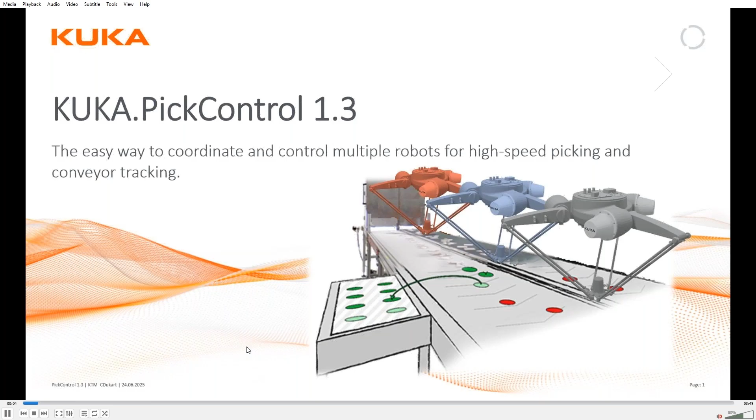So the part we're focusing on today is more the pick and pack side of it, not the palletizing side.

And I see my slides are not starting here for some reason. There they go, they are starting now.

When we talk about the pick and packaging side, we have some type of inbound conveyor, with parts coming down maybe randomly, maybe in a straight line. And then we want to take those parts and stick them into some type of container, maybe chocolates that we're palletizing or moving back and forth.

We can use various types of robots, we have our Agilus robot here, our Delta, and then Scaras. And most times, if not all the time, we have external resolvers that tell us where the packages or containers are on this side. Also on the inbound side, they tell us where each of these packages are based on a vision system, so we get an X, Y, and maybe some type of rotation.

We also have another resolver here, but you don't have to use a resolver, you can do it a couple different ways with your own external encoders also. And then we have some kind of trigger switches, like the prox switch shown down here, because we need to find out where the leading edge of that container is at, or the same goes here as we need to know where that package is at so we can go pick it up.

This uses the KRC5 controller, the micro controller, and then this is showing an IPC. Here we use this to help us out with the vision system side of it.

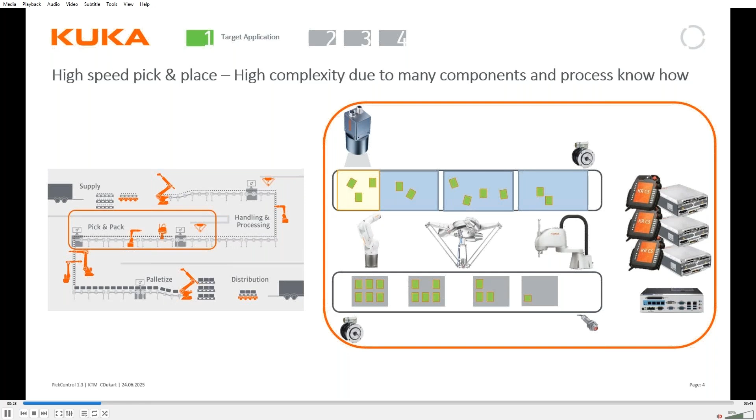As far as the software goes, the example here is 3 robots. We have a master and then 2 slaves, but it can support up to 10 different robots, or 1 master and 9 devices. And each of these robots have some working area. So here we're palletizing these cubes in the form of this KUKA logo.

Also, it is on 8.7 software, so 8.6 is not supported, just the 8.7 software. There's a couple different flavors. The PickControl Master here would integrate the KUKA Vision in it, but we can also just have a master robot with some other external sensor or SDK, this development kit that we provide. And then just basic software for the number of slaves that you need, so minimal amount of pick control software there.

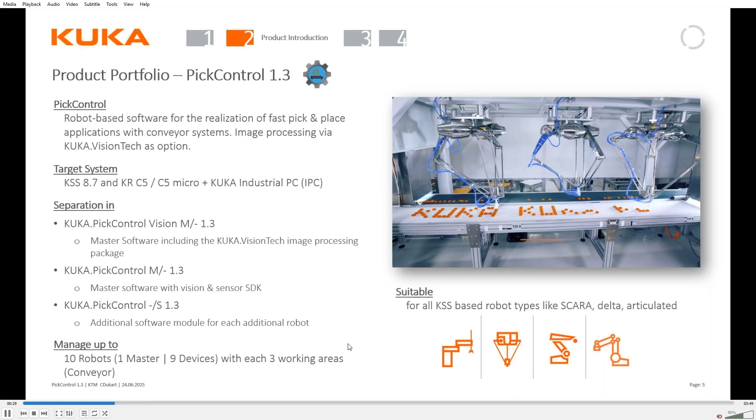And it's suitable for any of these machines, but it can also take the big machines also, even run a Titan if you want to.

So the 2 videos that I want to show are the first 2 here of some basic pick control applications that you see out on YouTube. I'll start those videos now. We won't watch the whole video, but some pieces and parts. You can find these out on YouTube if you'd like.

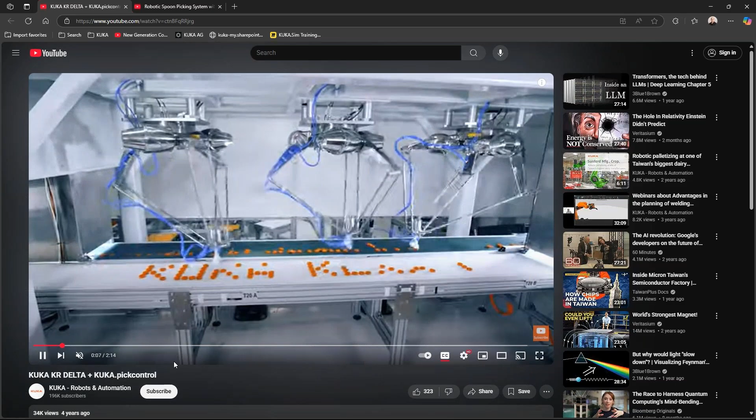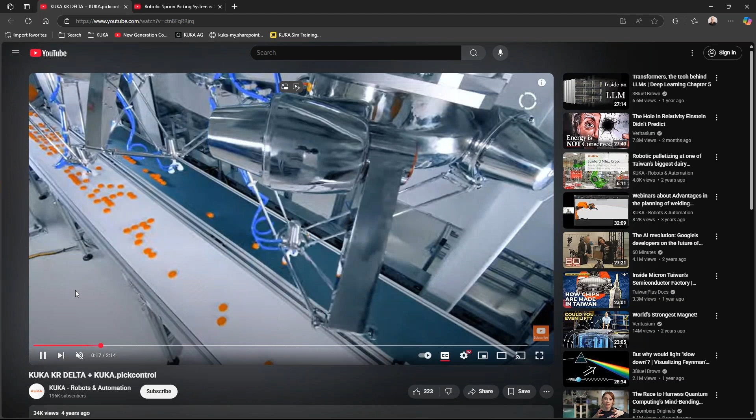So 3 robots picking parts off a conveyor. There's a vision system on the front side here that you'll see in a second. They're randomly defined, no orientation control here because they're just round hockey pucks. So here's the vision up in the front that's processing the parts and giving the information to the 2, or in this case, 3 robots.

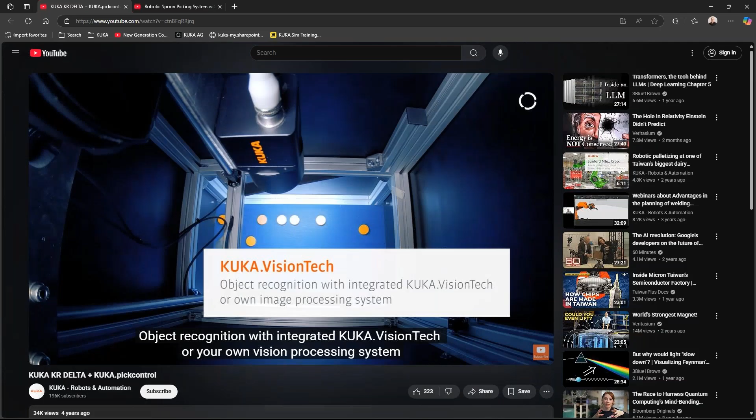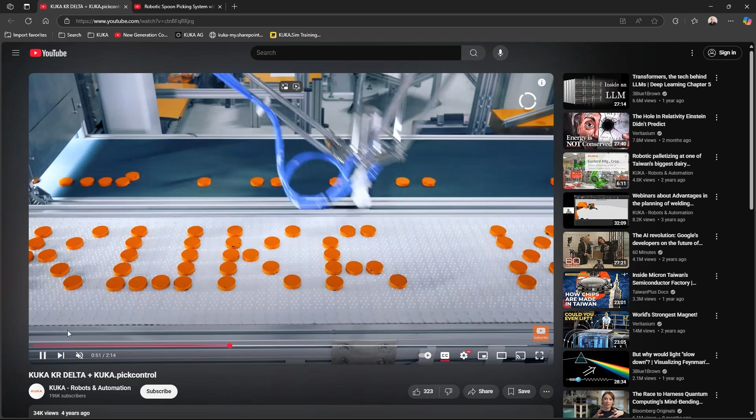And just some different software that we have. We'll talk about these pieces. This is how we define that whole KUKA logo there in software, so lots of different control there. The whole idea of this software is I minimize, I don't have to teach all those points. They're all calculated for me.

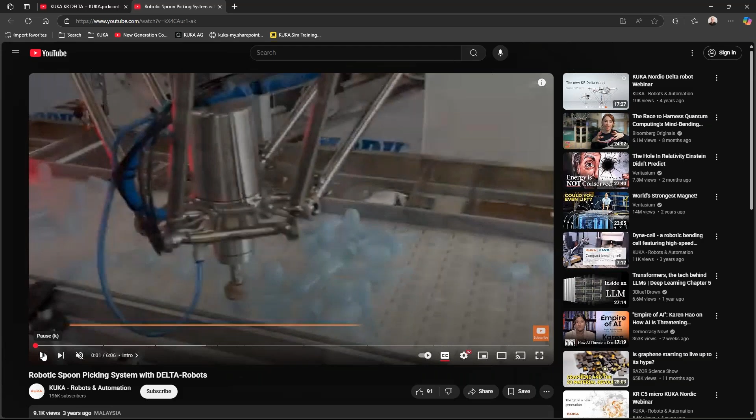All right, next one here I want to show is the spoon palletizing. This one was done in Malaysia, and I'm picking up these plastic spoons that are here.

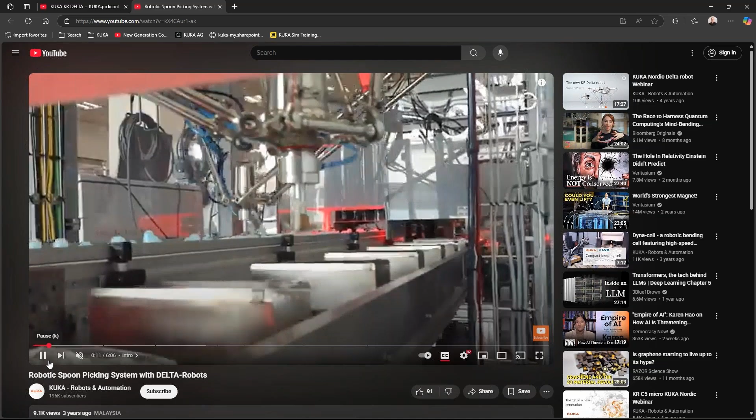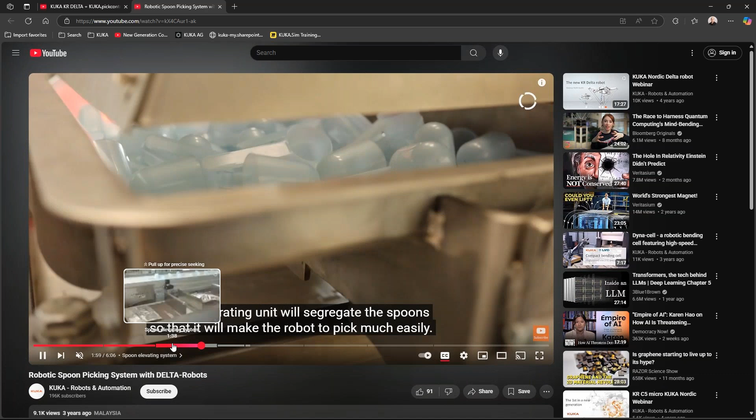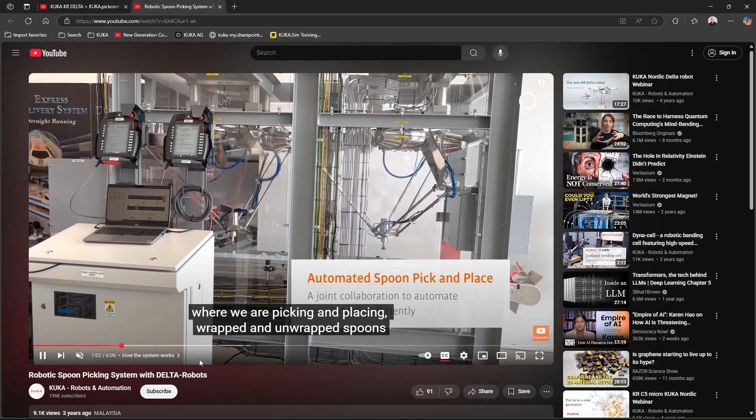I'm going to jump forward here, we don't need to watch this whole video, to the important things I need to show. Somewhere in here it shows the whole machine picking and placing the product, so one spoon goes in each of the protein bags that are there.

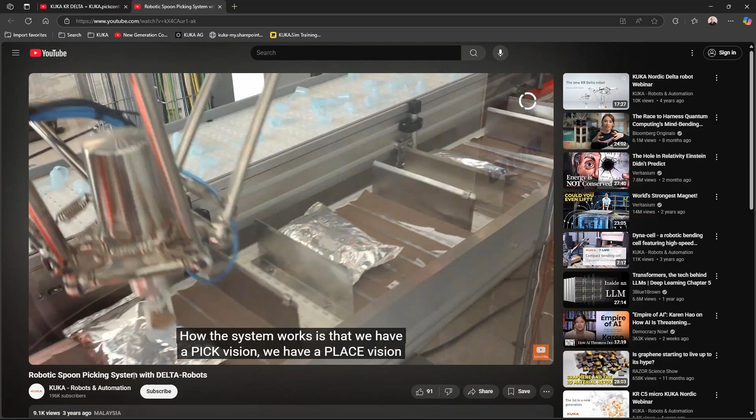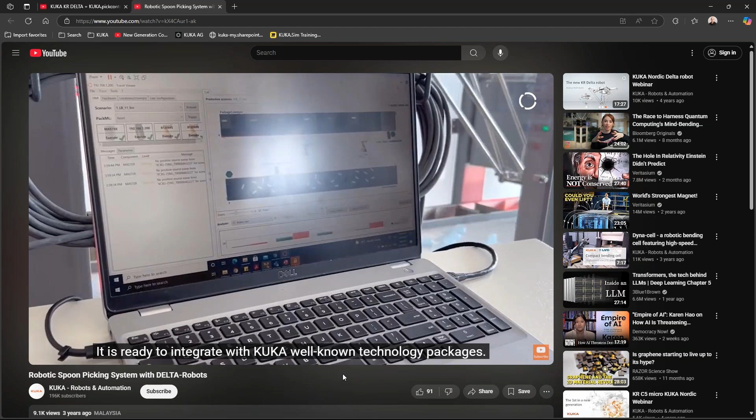And then I want to jump forward here to some of the setup to show that. So this tracking part, the vision system that's there, and should be right after this, some of the calibration fixtures that are used.

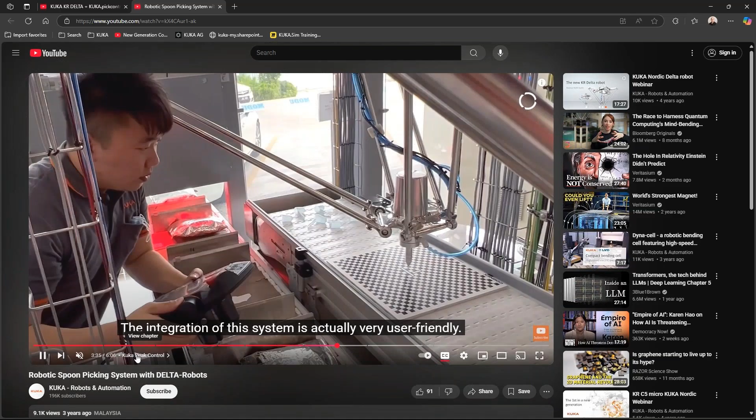Yeah, so the pointer is taken out, and then we use this calibration plate here. This is mostly used for the vision, but you use a similar calibration point to define a start location where you want to start, and then 3 points on the conveyor that defines where the parts are at, or the angles and the frame that's defined there.

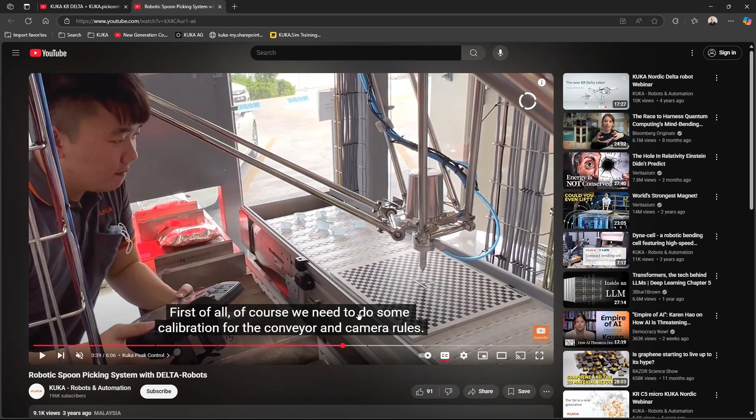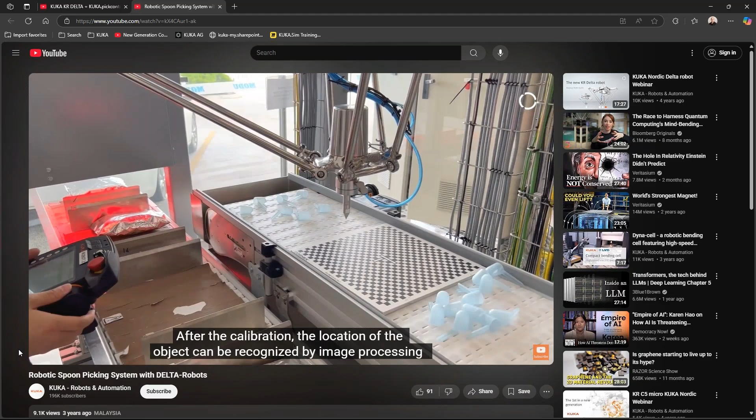That's what he's showing here, is teaching those 3 different positions. And vision is actually shown on the pendant. So we'll stop that and continue on.

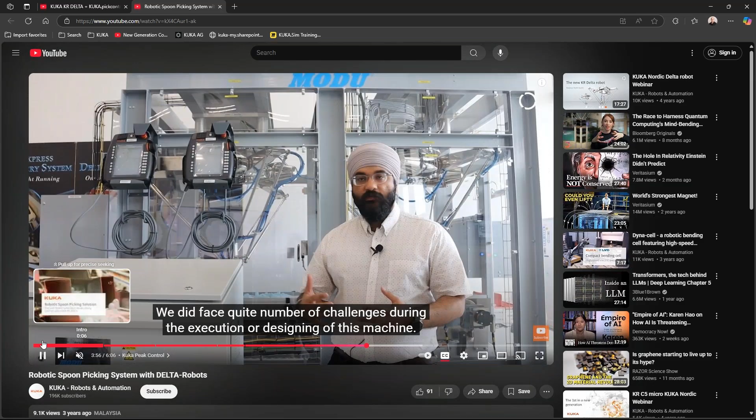The other items that are here are some of our setup videos on how to set the software up. There's a full video that shows you pretty much from start to end, and then some other marketplace items and the manual, which we'll go over here.

Okay, next section here is how to define the configuration. Everything is done in Work Visual, and you'll see this object structure. We'll spend a lot of time in here showing that, and then the definition, or this tracer view, as it's called.

There's also guided wizards to set up all the sensors, light barriers, conveyor positions, where we figure out what the transmission ratio is based on starting and stopping the conveyor, so that it smoothly picks and places how it needs to. And then the different scenarios.

So these scenarios, another word for this would be recipes. So that's what the production scenarios are called here. And we'll just jump forward here. We'll show more details on this a little bit later.

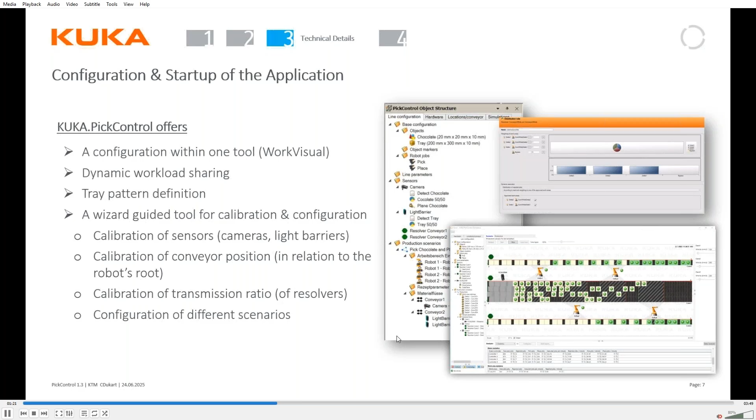All right, so some of the software components that are there, we use our PC and we configure everything in Work Visual. We also have an IPC for the Pick Control Master. So if we had 5 robots, we'd have 5 of these different machines, R1 through R5, and then we'd have an IPC also.

So the whole project and all the configuration also goes down to this Pick Control Master, so it knows where everything's at. So we can nicely see all the production information on this tracer view. It's a very nice tool. Love that tool, it helps a lot. And a bunch more diagnostics.

So on the robot side, on the controller, we have the Pick Control wizards that teach all my positions for me. We also have a PLC, a soft PLC, ProConOS that's running there that you would communicate to use PackML to control all the robots, and we'll talk about PackML a little bit later. The KRL is there, and then a conveyor driver that's run through PickControl.

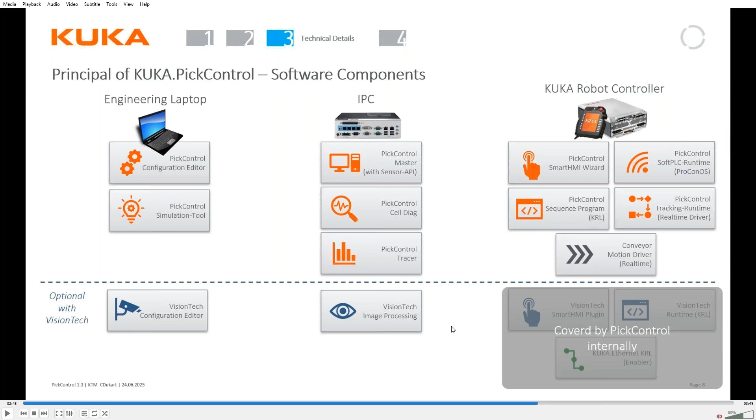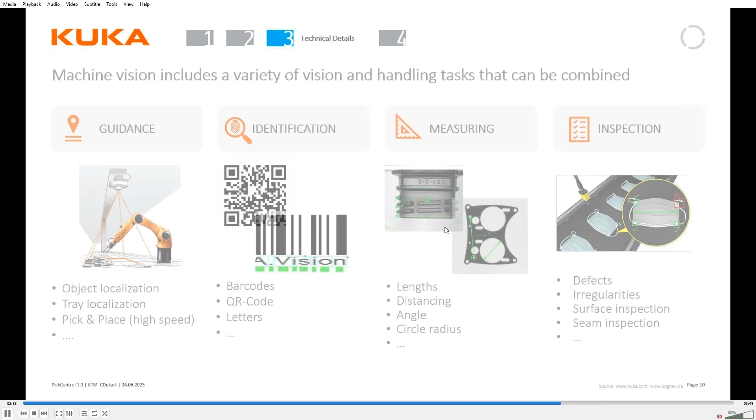And then on the vision side, we have a full Cognex library there that works quite well. That gives you all kinds of vision capabilities. Inspection, measuring, pretty much the whole thing.

So as far as the robots, we have a Delta machine that's IP69. You can see all these on the website. And then we have a composite machine also, which is right there, and this has the HO oil. So a little bit cheaper machine, not all stainless.

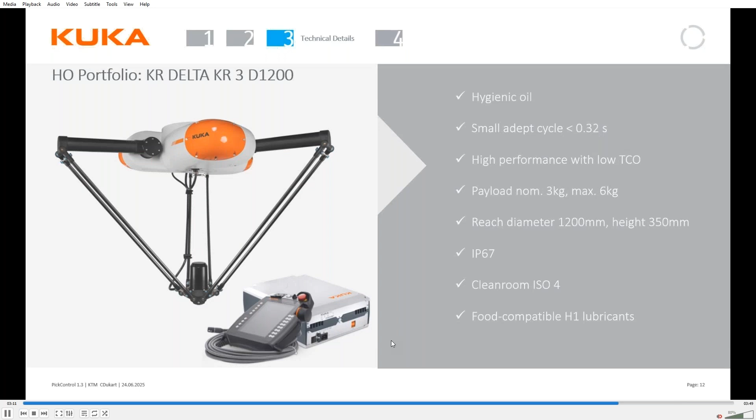All right, some of the key features here is the tracer view. As I talked about, one really nice thing that this does is this allows you to define all your scenarios and all your products, how they're going to be packaged. And then you can test this out very early on. You don't have to wait for the PLC guy to do all this work. If you are the PLC guy, you still don't have to wait for all this.

You can test this out and make sure it all works, make sure you get all your material flowing through. You can pick your product, place your product. So, very, very nice tracer view - a very good tool to use.

The communications definitely has to be PLC controlled. I would recommend that you have a PLC. It can be done through the submit, and we have done it before, but I think it's better if you have a PLC. There are so many parameters that you can change, and you want to be able to do that from a PLC HMI, not from the pendant if you can avoid it.

It's already got the DLIN or fast motion type in it, and the dynamic load sharing is a great feature - if I've got 10 robots, which robots get which data or which parts. Flexibility.

For vision, we have an SDK that you can use to define your own vision system. So it's a very wide open system, a good system.

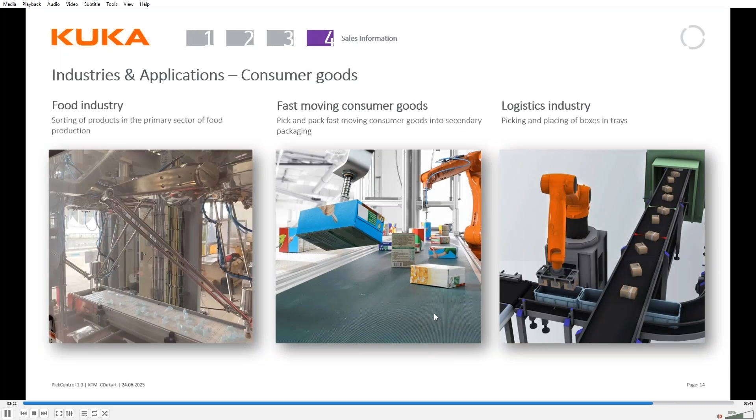Moving on, this can be used in lots of different areas - fast moving consumer goods, also automotive. I'll show some examples of that in a little bit.

Gripping and sorting parts, mixed parts - you kind of name how you want to do the system. It's very flexible in that respect, but does have some limitations as far as picking up parts at 90 degrees. You can consult with us if those special things need to be done.

It supports 10 robots and 3 working areas per robot, so I can have 3 conveyors. And if you're using your own IPC or industrial computer, you may want to check with us - it can be done, but with no PLC, as I said earlier, you probably want to have a PLC in the system.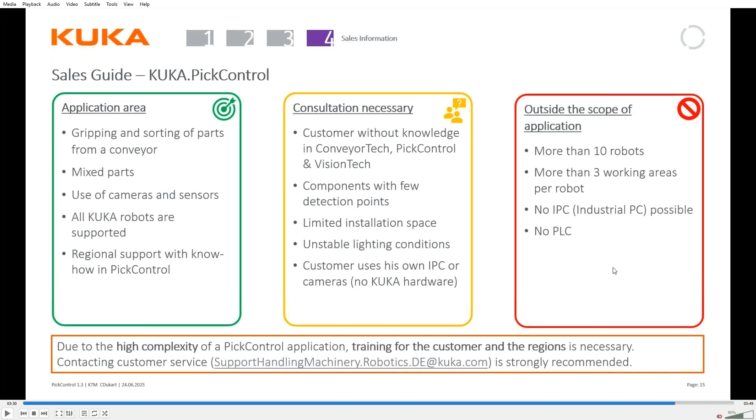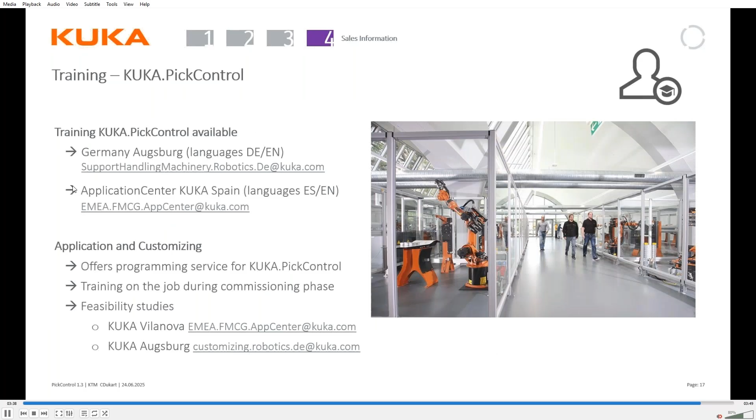So these are some of the questions you'd probably be asking - number of conveyors, and so on. We do have help - I'm one of the main persons in the US, but we also have international help too.

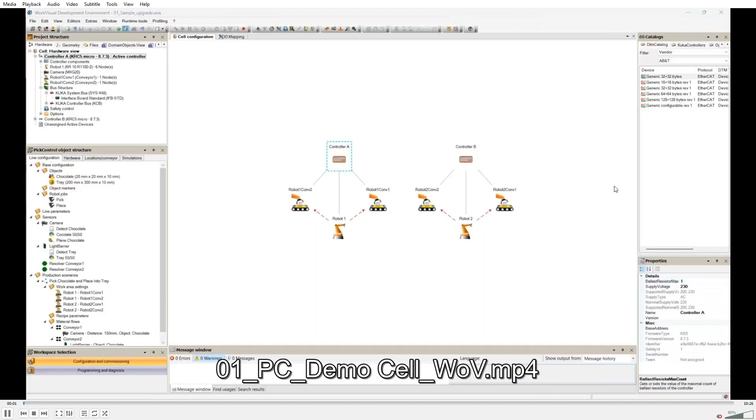All right, so let's move on to how we do things in WorkVisual. This is a sample that's defined in the software here.

If we go to the PickControl section, under documentation and the WorkVisual samples, this sample that I have here is the 01 sample, and the last one is a simulation. So we'll go through each of those now.

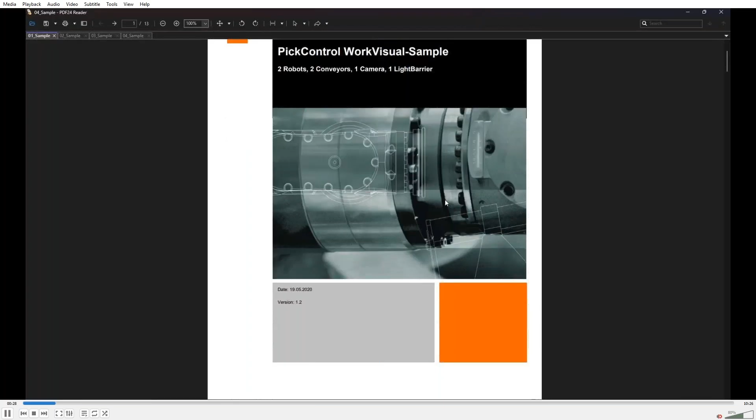This sample defines 2 robots, 2 conveyors, a vision system, and a light barrier. This document pretty much shows you how to create this whole template if you want to know more details about things here - 1 camera and 1 light barrier, and it takes you through step by step what you have to do.

So we'll jump forward here a little bit. This distribution is how we define what robots get what, and I'll show you some examples of that too. But all this is explained in this 13-page document.

This next one is one robot, one conveyor, one camera, one light barrier, and one fixed location. The fixed location is something that doesn't move. And then the last one is just a basic simulation - I'll show an example of this working and running a little bit later.

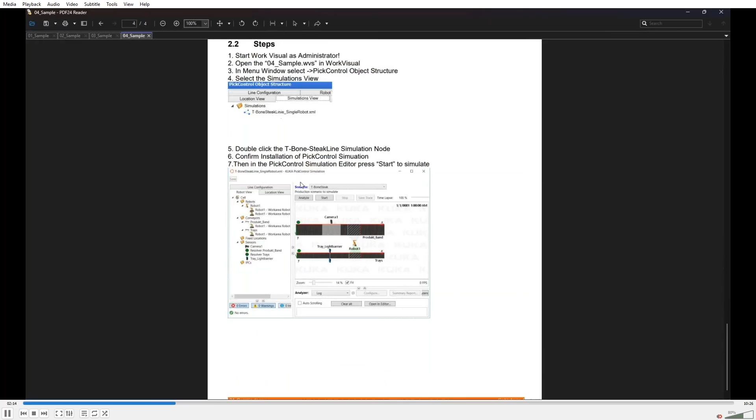So those are the 4 samples that are defined. And one thing I want to also show here is there are some KRL samples too, if anyone's interested.

Okay, so the first thing is the PickControl object structure. When I hit this button up here, that's what we're showing.

And then the next one is the cell view. So when you define a cell, we also have the cell configuration.

So we'll go back to that - what I want to show here is there are multiple conveyors. These are the KUKA conveyors that you have with the resolver, but you can also add external conveyors that are controlled by a PLC, maybe over Profinet, or just your own encoder feedback type conveyor. So other possibilities are there.

And then there's a way to generate all the code. That last button there generates the code so that you can use that on your IPC.

So the object structure here defines what kind of product you're picking up, and this happens to be chocolate, 20 by 20 by 10. Once we open this up, it comes up with a dialog box. Pretty much all these things have dialog boxes, and you can load your own image in here.

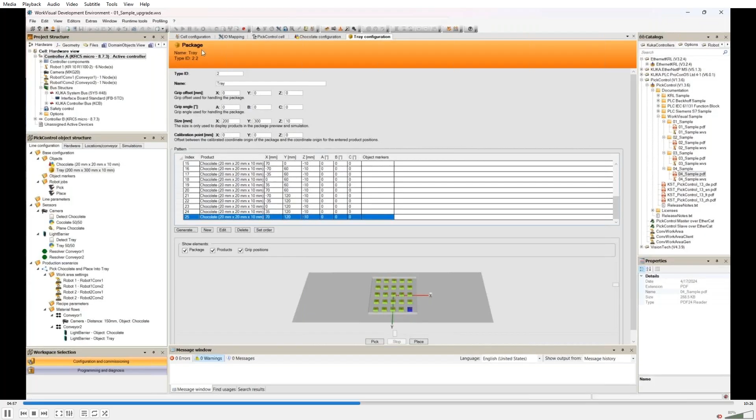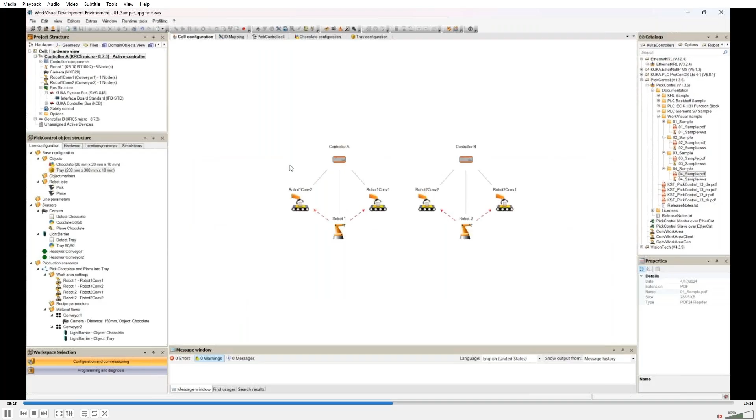What this is showing here is when I right click... There's conveyor 1, conveyor 2, and I have a resolver on each of these. I have a camera, and pick zones for robot 1 and robot 2 of where it's going to go. The light barrier there is for the tray. Here's the drive configuration. All our resolvers go in the back of the robot, so this would be the master, and it would have 2 resolvers going in the back. That's what this is showing, and the conveyors below it there. So that's our position tracker.

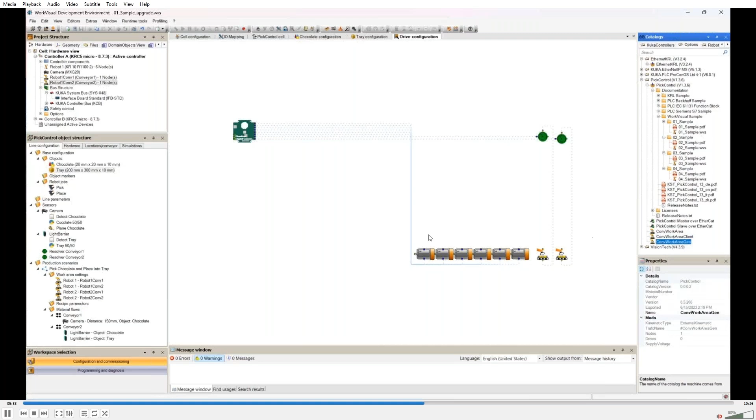As I talked about earlier, these other 2 types of conveyors are a Profinet conveyor, and then you can define some type of resolver, or not a resolver, but an encoder type input. So there's definitely some choices there. All right, what's next here?

Okay, sensors. There's our camera, and we've got a task always to detect our chocolates, and our light barrier also has a task to detect the tray for us. Those go into our fast inputs. The double click there shows the distribution rule. In this case, we've got 2 robots and they're both taking 50% load. Could be a different type of load, and if it can't do it on the first robot, then it automatically goes to the second robot.

And this is showing the second part of it on the second conveyor, conveyor number 2. What's the load distribution? Again, 50-50. And I'll just divvy those up as it needs.

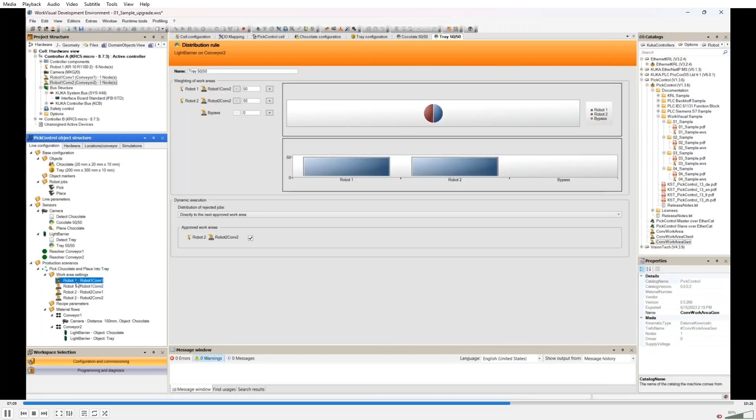Okay, so the last item here is how are our scenarios done, or what do the recipes look like? You can create new ones, you can duplicate them. I'd suggest you get the first one working properly and then go from there. These are the work areas. You define a number here in millimeters from the origin of the robot, left and right. That's the number it's showing there, and the same for the other robot. So we have 4 work areas.

Okay, now we show the material flow. If we have a camera and a trigger distance, this first conveyor shows us what the material flow is going to be. So we're picking product here, that robot job is the pick. And then we have our distribution of 50-50 that we defined earlier. And we're detecting chocolates - the object is the chocolate.

Then we define on the second conveyor, the tray is I/O triggered with a trigger switch, a fast input. We're going to detect the tray, display the tray, and the object going into the tray is the chocolate - that's our placing routine. So the pick and place are pretty much all canned and defined, not many points that you have to teach. Very nice system. The second one there is if the trays don't quite finish in the right amount of time, we have to tell it that it can bypass that - this one right here, also I/O triggered. We must have that, or it won't work and it gives you an error when you build the project.

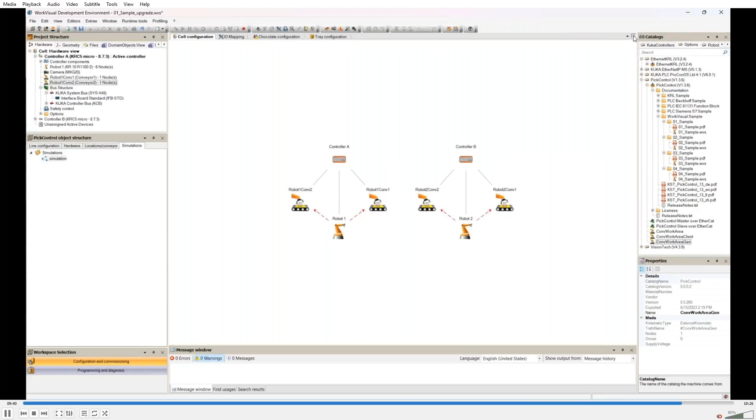have to build the project. So I'm closing some windows here. And everything is saved, and now I'm going to build the project. Oh no, there's going to be a problem, I have a feeling. Yep, there is. It didn't build.

Why is that? So we double click on it, and you can see here that we didn't set this output. So we need to make sure that controller 1 goes to our trigger, goes to a fast input. So that's what those 2 are there. Now we should be able to build the project, and it should work.

And what you're going to do is once you do this, you're going to send both projects to each robot, and then the IPC master also needs a project. So that's what that other button would do. And we'll move on to the simulation.

So once this is built and working, we can go use our simulation, or it's like a modified tracer view, and that's what this is going to show.

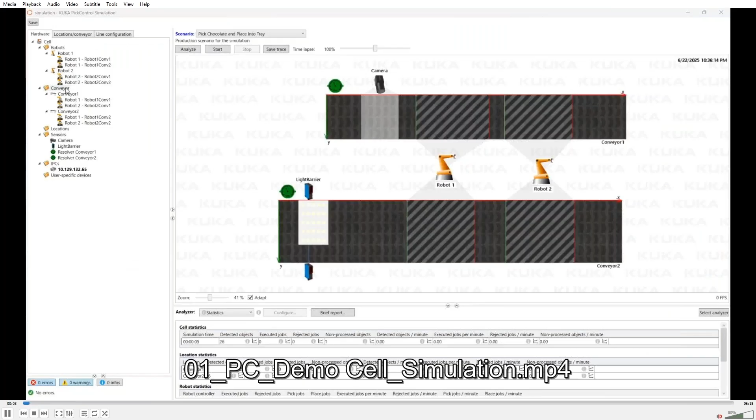So for each of our conveyors, we're going to define a velocity. So we got 160 millimeters per second, and then we need to tell it how we want it to generate objects. So we're going to generate chocolate here, and the position is going to be 150 millimeters away, and then it's going to rotate that by 30 degrees plus or minus. So we have random products that's going to be coming down on that first conveyor.

And then the next thing we'll have to do is we'll go to conveyor number 2 here and do the same for the tray. That's this tray that's here. And we're going to run at 42 millimeters per second. And this is just going to be an offset of 150 millimeters. No random spot on the second conveyor.

And as soon as all those parameters are set, we should be able to start the simulation. So we press the start here. I guess we're going to look at, this is a very important point. So the execution time here, so this is 500 milliseconds or a half second. That's how long it's going to take us to pick and place product.

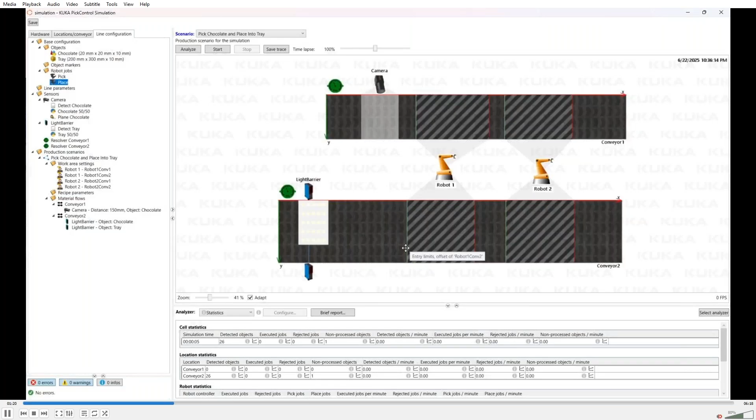And why this is important is this is going to kind of dictate our cycle time. So we need to have some idea of what that cycle time is going to be, maybe just estimated, but you can play around with these numbers and kind of figure out where you need to be for the cycle time. Now we're going to press start, and it's going to do this simulation based on all the parameters that we've defined. Takes a little bit of time to start here.

And I'm going to go look at the statistics, and the number I want to see is how many dropped trays that we're not going to be able to fill. That's the most important to me. And we got 160. If you see on the right hand side here, we got 160 for conveyor 1 and 42 millimeters per second on conveyor 2.

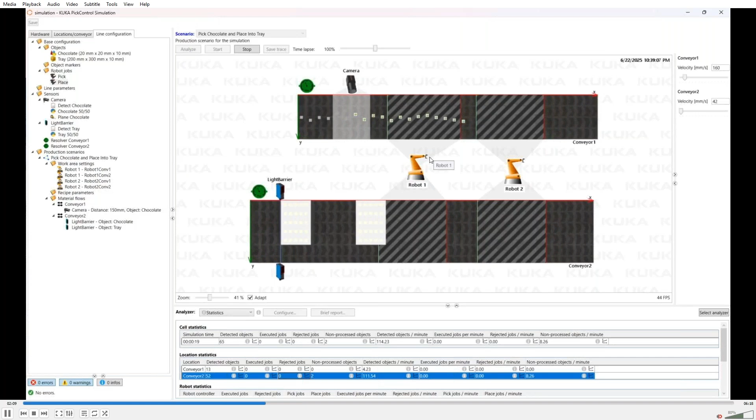So our product's flowing down randomly. We define that random offset, and robot 1 is picking and placing. You can kind of see it here, hopefully on the video, but you see there's a little dot here. That green dot says I'm picking and placing, and then it places product in here. The entry and exit limits that are set up and defined for the product so it can reach them.

Entry and exit limits - so the green and the red is what that's showing.

We're going to slow down the inbound conveyor a little bit, and probably go faster here, to 44. Does it miss any rejected jobs? Right now we don't have any. The reason we have 62 above on conveyor 1 is because we're not always picking and placing all the time, so we miss some of those products - that's why they're orange.

This one's probably going to miss - maybe we got to jump the speed up a little more. I bet we're going to miss some here. There we go, we missed some, so we should see some numbers pop in. If we move a little slower, maybe we'll make it. So you can do all these what-if scenarios here very nicely.

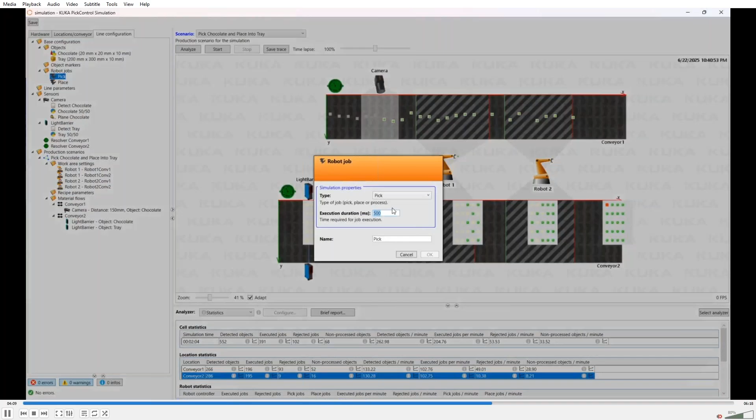Okay, now we're going to stop and change the pick time. We go to that robot task up there - as soon as it stops, we double click on it and we can change this. We'll change it down to, how about 350, so it can pick a little faster and therefore should be able to place faster. So that's where you set your pick and place time.

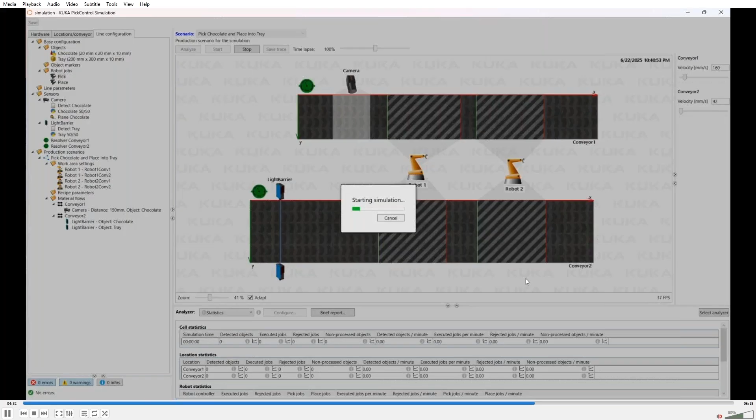And we jumped that up to 42 millimeters per second - jumped our conveyor speed up a little bit. You can see the dot signifying it should be a little bit faster now, and you can see by that picking time, that really fills this up. It's way ahead, quite a bit faster, and we should easily make the rate here. It looks like we're way ahead.

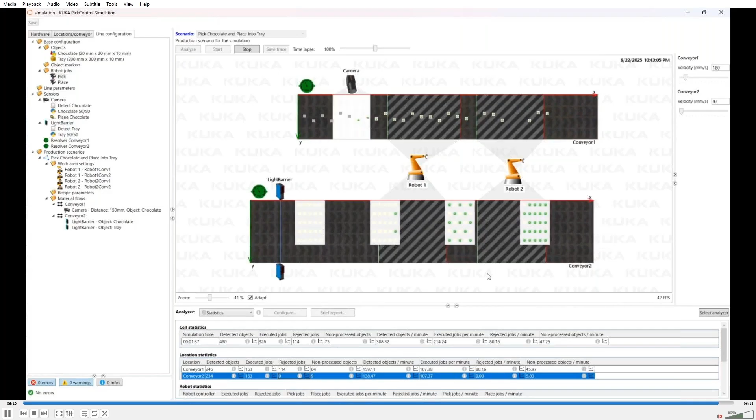And we have not missed any jobs yet, it doesn't look like. So we can jump that speed up - we'll go to 47 millimeters per second, and we should probably start losing some now. Yeah, I bet we're going to lose some right here - oh, maybe the next one. But you can still see we have no rejected jobs on the outbound. Are we going to lose some? Well, eventually we'll probably lose some.

Okay, so the next section is example number 4, and this is simulation only on the 04 sample. You can see nothing is defined here. This is just a simulation, and I personally don't like to do it this way because then I don't have any real cell. When I create this cell, I can download this whole project to the robot controller, and everything should be set up and working for the most part. I'll still probably have to play around a lot in the real world with gripper times, scenarios, and exit and entry zones, but I can do a lot of this work up front.

So let's show the simulation here - here's our T-bone steaks. This is a little bit different system: one robot only, an in-feed station, and a pallet station. So this one is defined.

All right, Jules, do we have some numbers for my questions? I'm going to say ribeye was the winner - we had a couple come in, oh, great group here for sure. That's my favorite too, love the spinalis around the outside on a ribeye, can't beat it. T-bones, too much work - way too much work. How about you, Jules, what'd you pick? I think I'm going to go with ribeye. I think that's a solid answer, good choice. I bet you're just saying that because I said it, right? No, it's a good one. Okay, alright, let's continue on here - you guys sidetracked me with the meat.

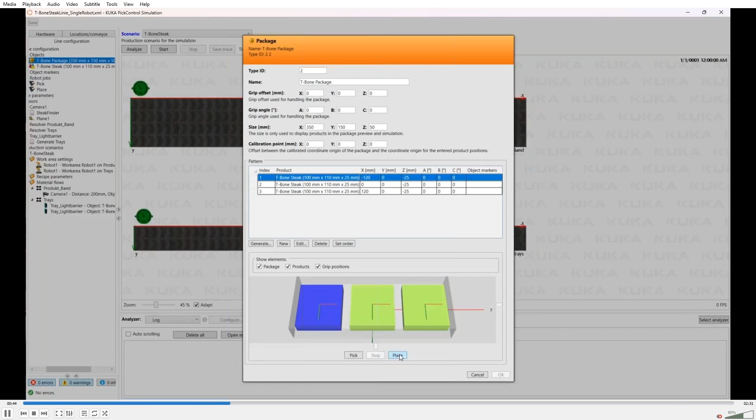So what this is showing is the T-bone steak, and I have 3 packages this time that go into a carton. So I'm picking one ribeye and sticking it into this package of 3 - 3 is always better than 1, right? But these are T-bones, and there's my image that I can stick in there so it looks nice and cool. Maybe I give this to my end customer to use.

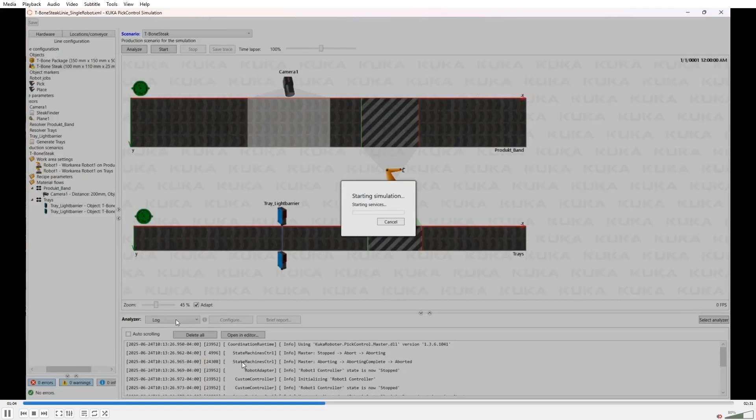Let's just jump forward here a little bit. So there I have my tray coming in with 3, and then I have my ribeyes up here. Notice this turns red, and that's because it stopped this conveyor - so I have control to stop this outbound conveyor. Once it sticks these in here, it does these really fast - I think these are set to 50 milliseconds, very unrealistic, but you can change that number to whatever you want. Once it fills that tray, it moves on. This can also place these in the tray automatically on the fly while it's moving. So that's what that's showing.

All right, you guys probably get the idea here. And I also have my camera up here scanning the product.

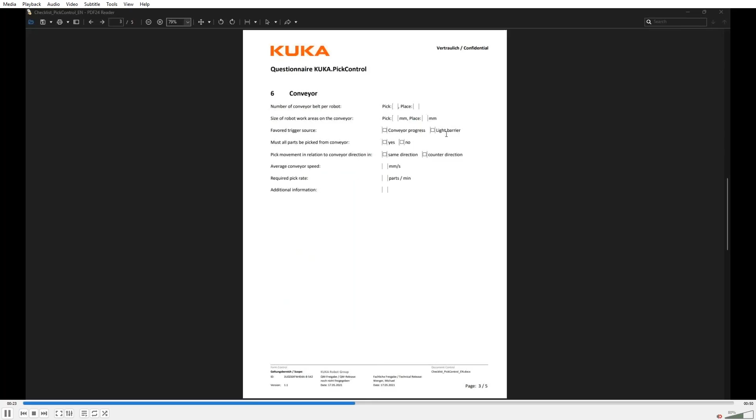So we'll jump forward a little bit. One of the last items is a checklist that asks lots of different questions. We've developed this because this application can be crazy sometimes with what people want to do with it. It covers things like how many parts per minute, what kind of gripper I'm using, and I don't need to pick just one product. I can pick 3 or 5, but I do have to do some customizing in KRL code if I want to do that. What's my trigger source, light barrier, or vision system?

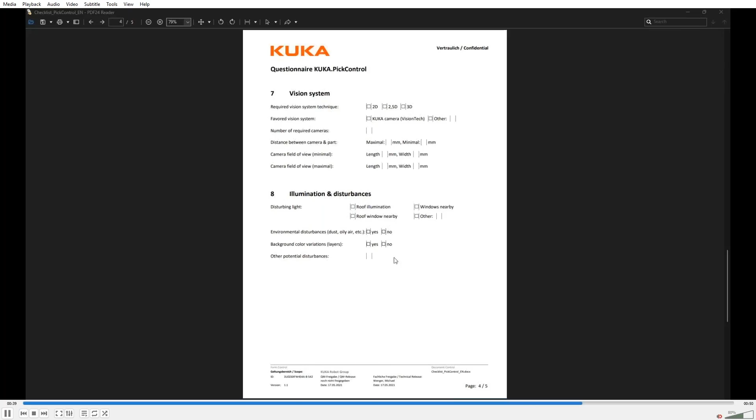Vision, 2D, 3D, all these items. Then the last section is about extra light coming in with vision. Light sources are always very important. Do I need to put the vision camera in a box so I don't have any shadows?

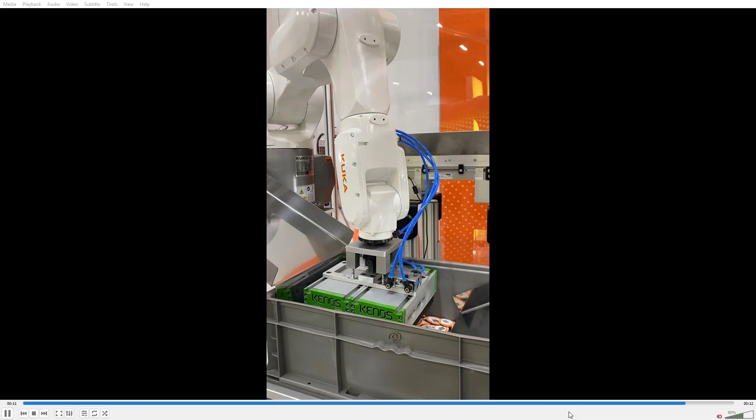All right, and the next section here is some examples. This is showing our demo system in Shelby Township. I've got a robot picking these poker chips with pictures on them, and then I've got 2 deltas and 1 SCARA. We'll stop it here.

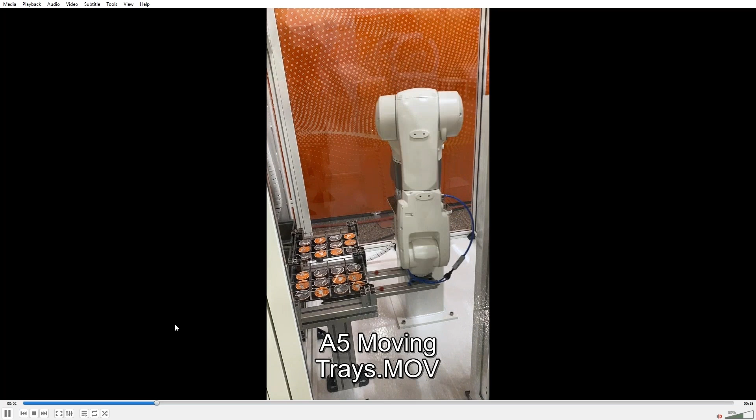So we'll jump forward a little bit and show the last robot. These are the trays moving in and out of the system. What's happening here is this SCARA is placing these 3 in here, and I think it does 4 or 5 layers deep, then fills this tray completely up. So that's what it's doing. Then it puts it in the stack of trays, and there's a KMR, KUKA KMR, that takes these products away.

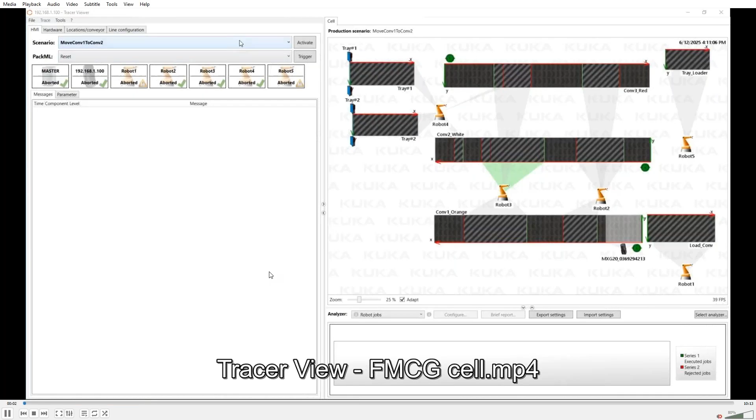So that's that. I want to show the PickControl tracer here, the tracer view. This is of that actual cell. So what's happening here, let's go back just a little bit.

Very important part here. This shows the different scenarios. There were 3 different scenarios for this, picking product from conveyor 1 to conveyor 2, conveyor 3, and we're using just the first scenario. This tracer view allows you to pick those scenarios because I've defined them, and I can do this all before the PLC is ready.

What this is showing here is each of these statuses of these 5 robots change. So I cleared them, they should go from aborted to some other state, stopped. It's an easy way, we call this PackML. This is a standard that a lot of the bigger packaging and palletizing companies use to define all these states, a state machine. This is documented in the manual also.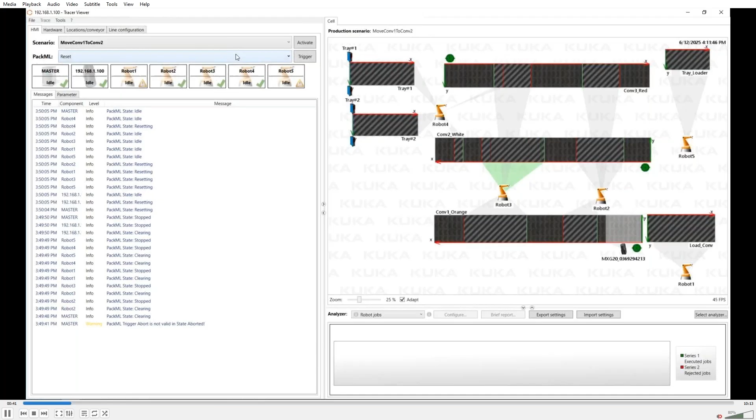Now they went to idle, and now what should happen is when I hit start, they should all start up automatically. This is using our automatic external function, but I don't have to do a lot of work to make this run, and I can do it from this tool. So great, great tool. Now the packages are coming in on conveyor 2 here, or fake package.

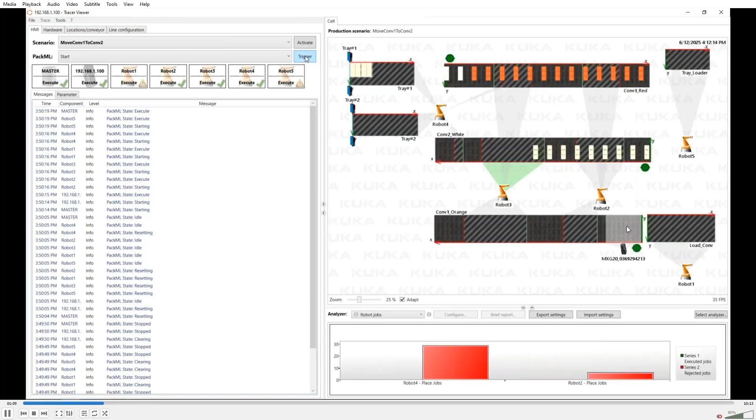We're just placing on the conveyor, so we don't really have a real package there, but to the software we do. And then we're waiting for parts here, the little parts in here, and you'll see those come here in just a second. We will bump this up a little bit because it's pretty tedious, 10 minutes of this.

So there's our packages, and you can see the orange dot here of when it's doing its placing. And this robot's decided I need to stop the conveyor because I got to fill it up. So that's what it's doing right now. It's filling all these spots. It has to fill all 3 of these spots so they don't go off the end of the conveyor. Now it's green, it's running.

This guy is not able to stop the line, but robot 3 is. So placing, picking. Now it's starved for product. So as soon as this package here gets down to the end, it should stop it. So it should stop it, right about there. So it stopped it, and now it's waiting for product.

This guy stole my piece, and you should see it grabbing some more here. I'll just jump it forward a little bit. Now we got a bunch of product coming. So it should be filling those up.

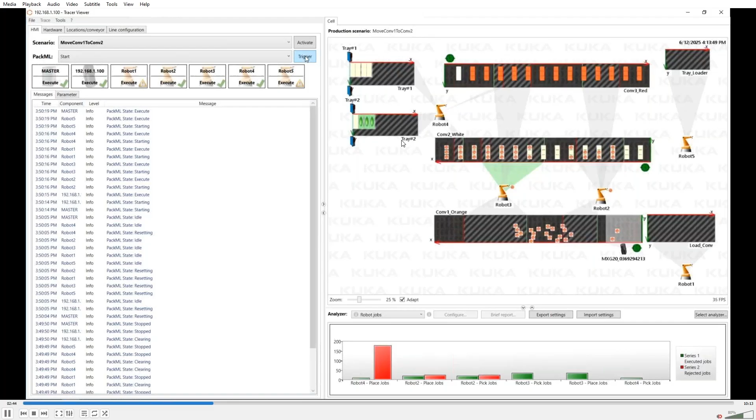And then also what's happening over here on this one is I'm putting product in here. And remember, it has to stack 4 or 5 high. So then we see the icon change. And we should see that icon change maybe after 4 or 5. I don't remember what it was. So 1, 2, 3, 4. It should put a dot in there, and it did. So put that dot in there.

And the other robot here, this last loading robot, took this away, and it's got a tray ready. So this is what we call the stationary loading spot. They don't actually move. So once that's done here, we'll see that last dot go in there, and it should be taken away.

Oh, it's not moving now. Let's give it some, we'll jump the video forward here a little bit. There's some more product for you. Robot 3, start filling up. And there's some more product.

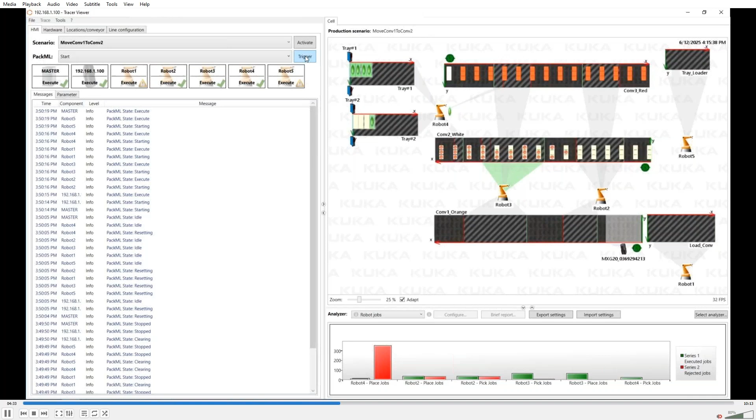You guys probably get the idea. And then that last one filled up, and now it should be stacking product over here. Yep, there it goes. All right, we will move forward. Unless somebody really wants to see that, you can put that in the chat, but you probably don't. So we will move forward.

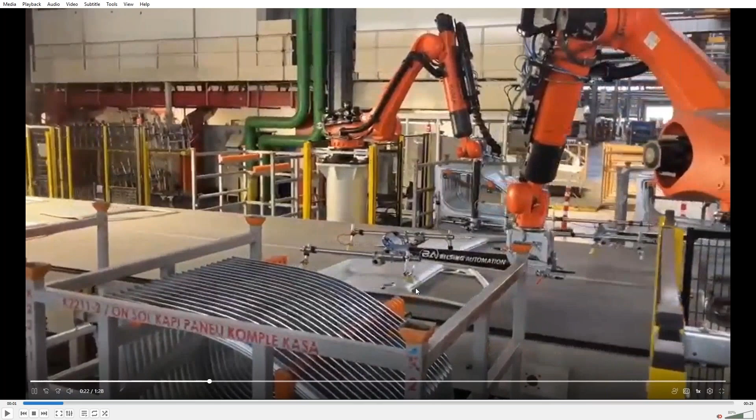And the next thing I want to show is some different ways to use pick control. So what this system is, it's in an automotive facility, and it's using pick control to pick these doors. Well, these doors aren't really flat, or I mean, they are pretty flat, but we're going to have to rack them in here, and this is going to take some custom code.

So what's done is we use the pick control to pick the products because we have 2 robots in here. We have 2 robots on the other side also. So we pick it, and then we can just use our own KRL routines here to place this stuff in here. We don't have to use the pick control to do that. So that's how this one's done. Kind of a cool application. Big old console robot with long reaches, big tools too.

Okay, that is the end of my presentation, and we're at 42 minutes. Jules, we got some questions.

Maybe she's sleeping, no? Hello? Jules, I'm not hearing you. Can you hear me on my side? Sorry, yeah, my Bluetooth must have just died. Can you hear me now? I can hear you. Okay.

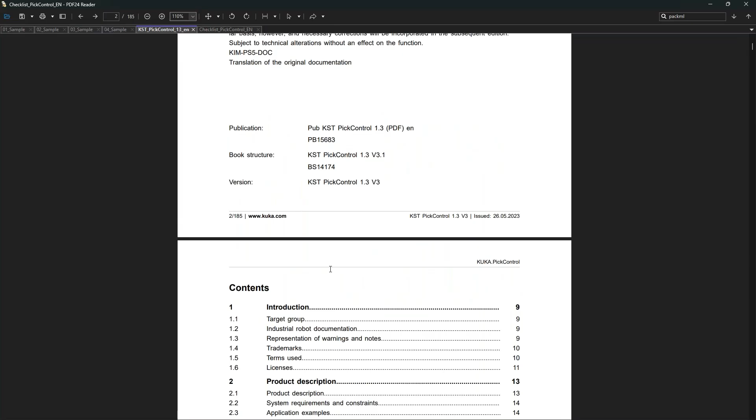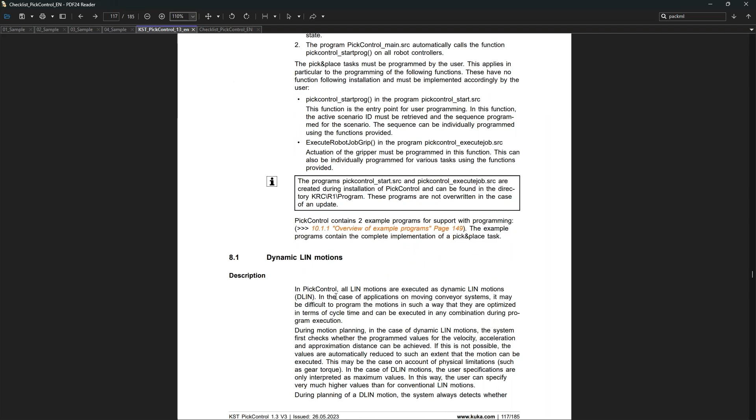But we do provide documentation on that. Let me just show that, because that's a really good question. What I'm showing on the screen now is the pick control document. If we go to the section on programming, these functions are all defined here—the init, using the fixed workbase, all of these are pretty much defined here in what has to be done. So the idea is very, very little programming.

But you do have to define things like the valves for your particular gripper, that kind of stuff, which would be expected. All right, next—looks like we have just one more here: how do I calibrate all robots to inbound and outbound conveyors, vision, trigger switches, and fixed work locations?

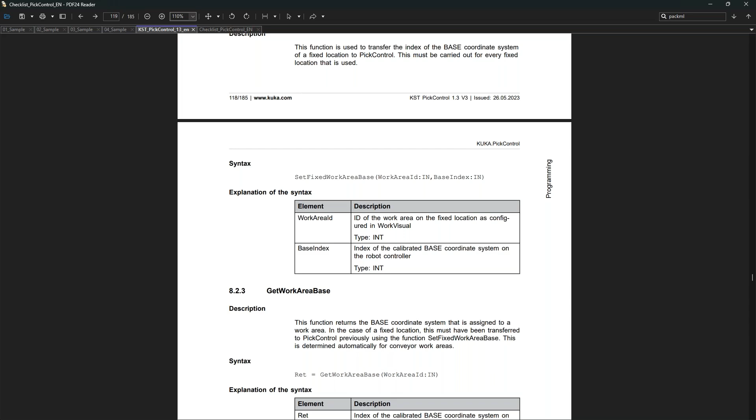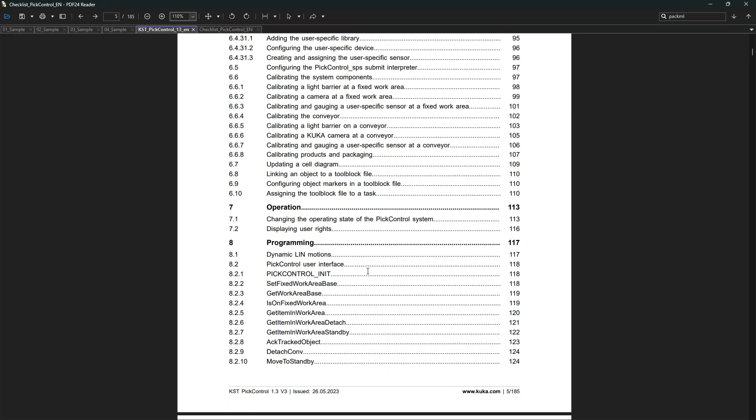Oh, another good question. So the way I do that is... sorry, lost my train of thought here. If we look in the manual, let's go back—I think, yeah, so there's a calibration section here. So we do this like around, calibrating the conveyor. I think there's a good picture. Yeah, right here's the picture I'm looking for.

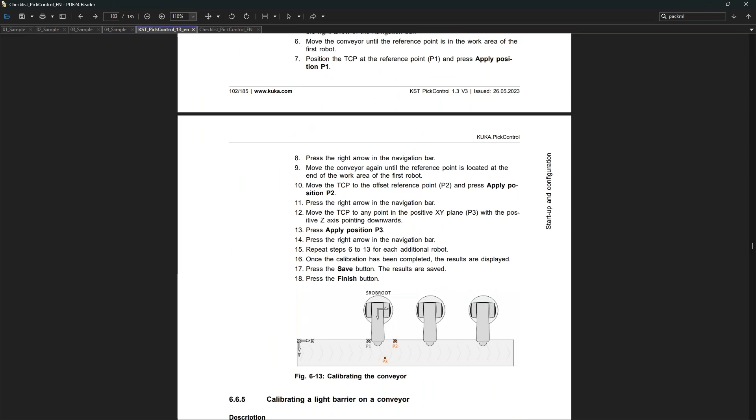So to calibrate the conveyor, we have to teach these 3 points. What these 3 points do for us is they define the origin of where the conveyor's at and what the speed of this conveyor is for the gear ratios. So that's what these 2 points do here, and then the third one just defines that frame as the part's coming down.

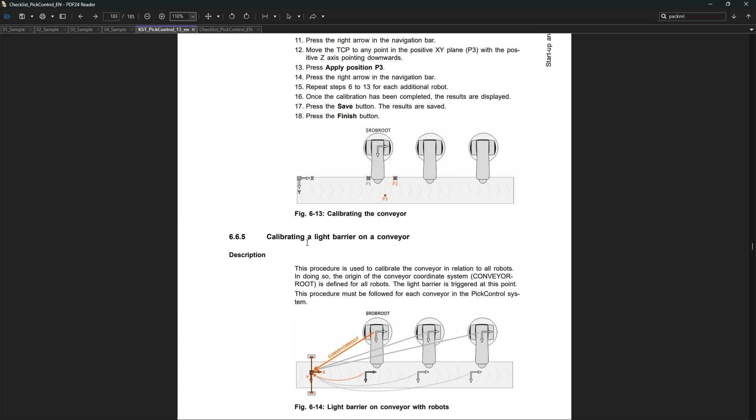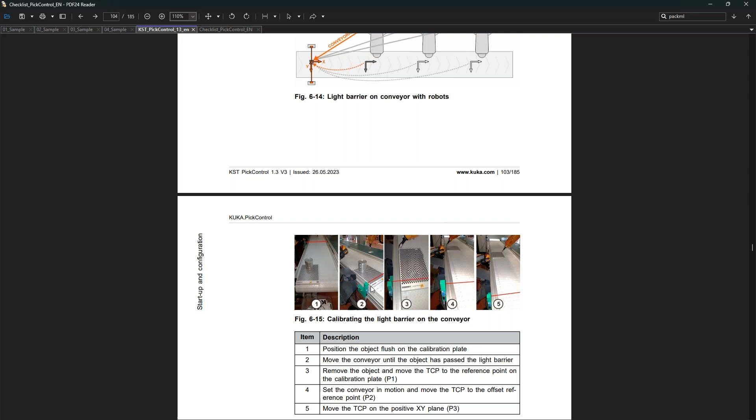As far as the pallets, if it's a fixed location, I have to teach a frame for that. And if the conveyor is moving, it's just like the inbound conveyor, but there's a template that teaches all this for me. And if I have a lot of machines—let's say I have 10 machines—I need to go to each of these machines on the pendant to calibrate each of these locations, teaching these 3 positions that are defined here, kind of how you define a base.